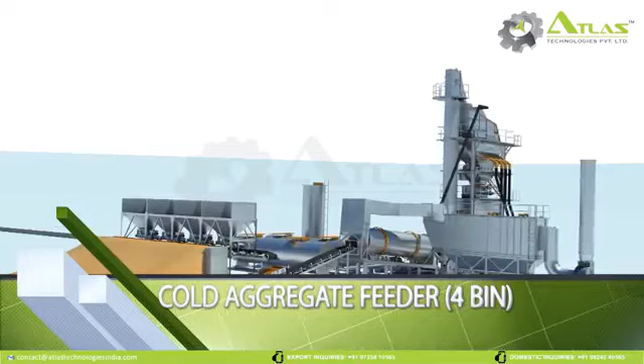The material is poured into the aggregate feeder system comprising of 4 bins. The feeder belt conveyor is mounted under each bin. This gathering belt conveyor transports the aggregate to the vibro feeder system.

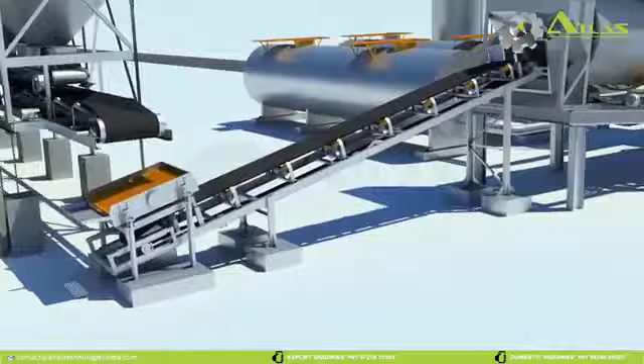Drying drum: the dryer is divided into 3 sections. The conditioning section, where aggregates are fed into the inner dryer and start forming a curtain. The combustion section, where the burner flame is maximized to heat up the aggregates in a short while. The discharge section, where the hot aggregates get discharged out of the dryer.

Pollution control unit. The air along with dust particles enters into the pollution control unit. The heavy particles are separated from air in the pre-separator area. Then it's allowed to pass through a series of bags with the help of an induced draft system. Fine dust particles get accumulated on the bag and clean air passes through the bags and is released into the atmosphere.

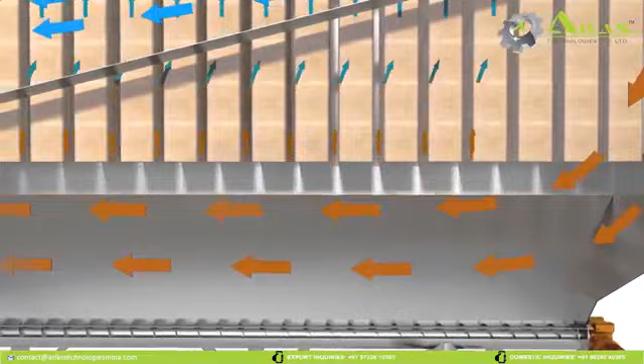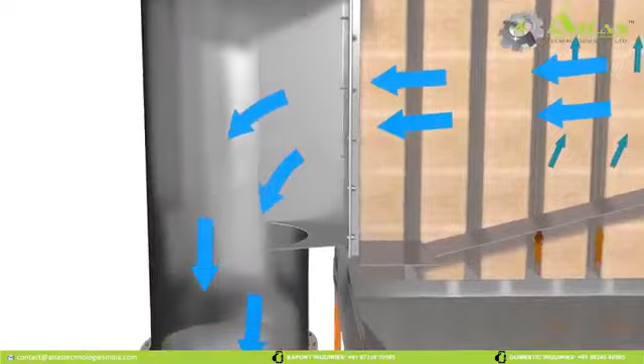The bag filter has sufficient filter bags to collect the dust. The filter bags are completely cleaned by a reverse airflow system operated by a Geneva mechanism. All the dust collected from the bag filter is carried to the dust hopper through the screw conveyor.

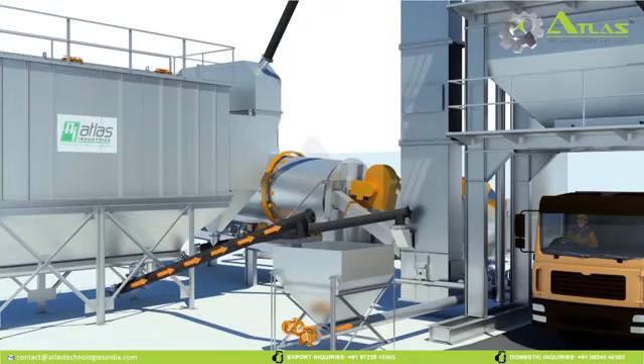Dust hopper: all the dust collected from the bag house is accumulated in the dust hopper. Dust from external sources can also be added to the dust hopper. This collected dust is transferred to the dust storage hopper mounted on the tower via screw conveyor.

Hot elevator: after hot aggregates get discharged out of the dryer, they are elevated and carried into the screen by the bucket elevator.

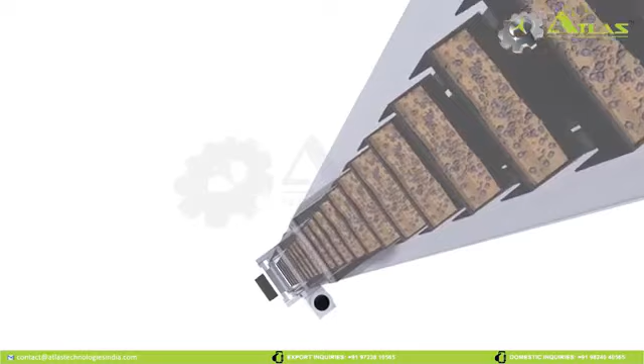Now let's move on to the vibrating screen system: vibrating screen, hot bin and aggregate weighing hopper. The Atlas vibrating screen is much easier to maintain. Screen mesh can be replaced easily by push and pull action. The vibrating screen separates the aggregate into different sizes and discharges them to their respective hot bin compartment.

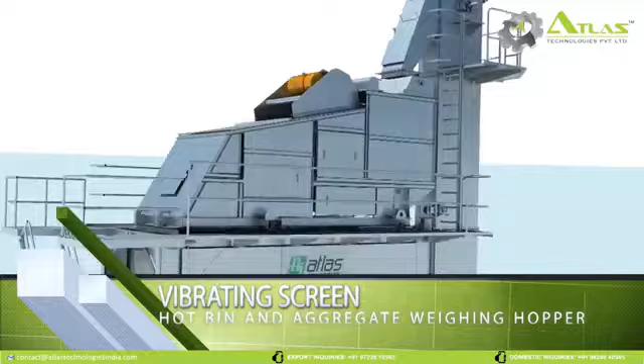Each compartment of the hot bin contains a radial gate at its bottom to feed aggregate into the weighing hopper. Aggregates are discharged from the hot bin according to a predefined recipe into the weighing hopper to create a batch. Once the batch is prepared, it is discharged into the mixer.

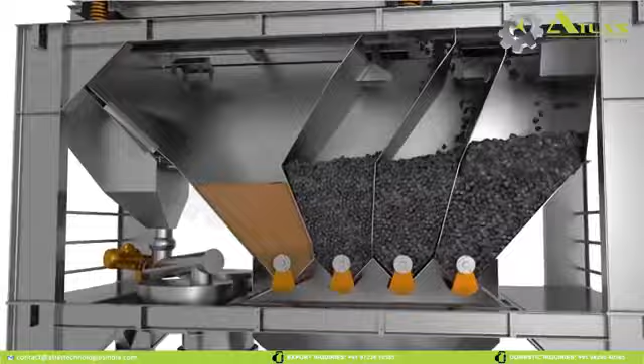Bitumen and dust weighing system: the bitumen and dust from their respective storage are supplied to their respective weighing bin where they are measured accurately and then efficiently discharged into the mixer.

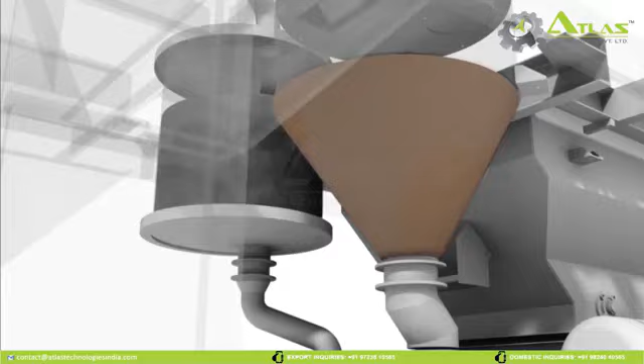Storage silo: asphalt mixture is now stored in the silo and from there it will be discharged into the truck. The fresh high-quality asphalt is now ready to be laid on the road.

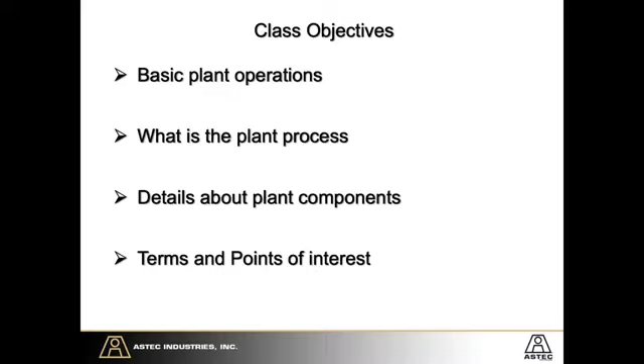Basically, the class objectives are going to be basic plant operations, what is the plant process, and details about the plant components, along with a lot of terms and points of interest.

As you can see in this picture, these are some of the models that we use for training, and this is a stationary asphalt plant. The models give a good representation of a clean asphalt plant that you can actually go in and take a look at the components without the dirt, debris, mud and grease on the components. So as we go through this, we're going to refer to these models many times during this presentation to give an adequate determination of what's going on with the plant.

Here's a portable plant. As you can see, the footprint's a lot smaller. One of the reasons for portable plants is they're highly portable - they can be moved around easily. You can see that everything is pushed together in a much tighter space.

They are still capable of high production rates, all the way up to around 500 tons per hour. At the center of every asphalt plant is a control house. This is the central location for controls. It manages all of the plant operations.

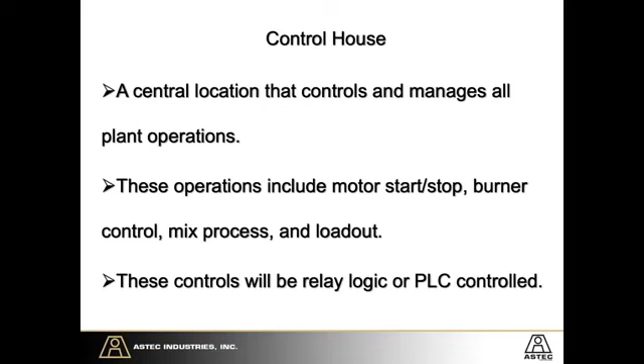These operations include motor control, start, stop, burner control, mix process, and loadout. These controls could either be relay logic or PLC controlled. In the lower left-hand corner is a relay logic picture of a relay logic plant. In that plant you'll notice lots of push buttons and consoles around the entire perimeter of the control house. 20 years ago, this was the normal, and this is what you would have seen in any asphalt plant.

As we move forward, in the last 20 years, lots of PLC controls have been introduced. These PLC controls have changed the demographics inside the control house tremendously. Instead of having several consoles around the perimeter, it's very common to just have two computers processing the whole control inside. It's been a change for operators over the years, but the PLC is being pushed and mandated a lot of times by the state.

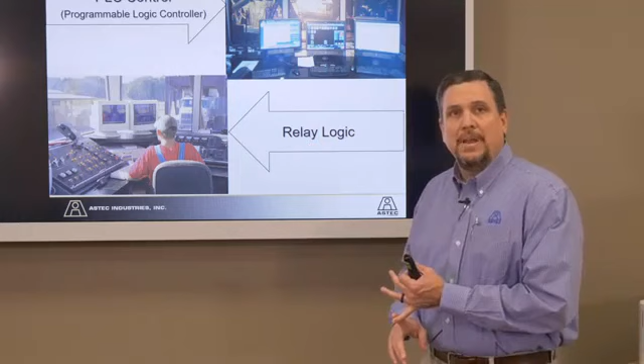Even on the older relay logic systems, when you looked at a blending control, that particular blending control more than likely had either a proprietary blending control or a PLC blending control associated with the push buttons. Some people ask, what's a blending control? The blending or mix control allows the operator to enter a job mix formula that can control and properly proportion aggregates, recycle, asphalt, dust fillers, and liquid asphalt to meet the required specifications.

These blending controls have changed a lot over the years. Back when asphalt plants first started, if you were at a batch plant, you would pull levers to get the ingredients that you needed, and they'd be weighed up on a scale, and you basically just eyeballed what came up. Now that you've got computer systems involved, it's a lot more precise. Mix specifications can be a lot more calibrated, and everything can result in better mix quality.

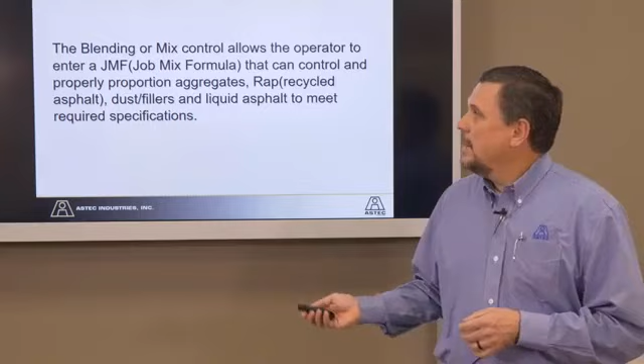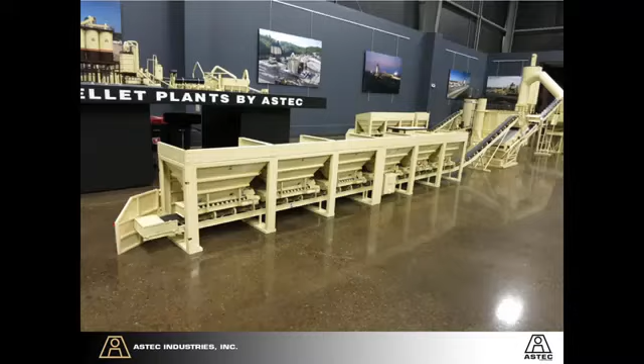If we start with this process, everything starts at the cold feed bins. This is where your virgin aggregates are entered in. Here's a good representation of a 6-compartment cold feed bin. As you look at these cold feed bins, they're always going to refer to the one that's closest to the shaker deck or the conveyors as your bin number 1.

That's where you're going to put your fine material. And as you move through those bins, the coarser the aggregate will get. So you start out with very fine, and then as you move down you become coarser as you get back towards the end of that. As we go through the presentation, we'll talk about that and the reason for it a little more.

If you get a top view of the cold feed bins, this is a grizzly that you see on top of this. Some people ask, what's a grizzly for? Well, a grizzly is to keep all of the debris larger than the specified material out of that bin. You take sand -- things like that are very fine. That's where you see your grizzlies at.

The reason you see grizzlies is because a lot of times roots, debris, and sand that has congealed together and made a large ball -- you do not want that type of material to fall down into the bin, and we'll talk about that too as we move forward.

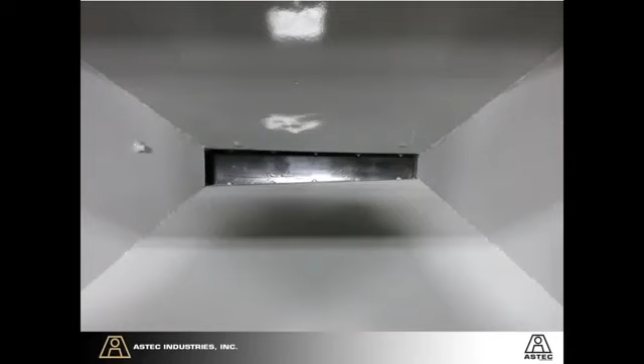If you take the grizzly off and look down into the bin itself, you'll see that at the rear of the bin you have an opening, and then as you move forward that bin opens up a little bit. What that means is that it's self-relieving. And so it does two things: one, it keeps the bin flowing well, and two, it keeps the bin falling evenly.

You talk about segregation -- segregation in a cold feed bin, as long as you've got good material, should be minimal. But when you move to a recycle bin or something like that, and you're not fractionating properly, it is very, very easy to segregate the material. So that is the reason for the self-relieving bin.

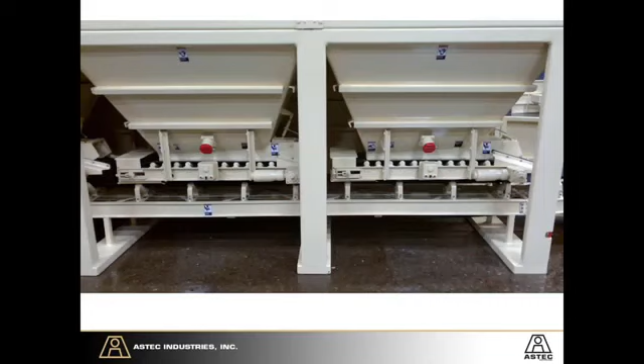Here's a side view of the bins. If you look at this bin, they are equipped with vibrators. These vibrators actually keep that material flowing. They can be designed a lot of different ways. Sometimes they can be connected directly to the bin.

Sometimes they can have a dancing plate on the back. And sometimes you can use bin butlers or things like that to keep that material moving. But these vibrators can be controlled automatically or they can be controlled manually. One of the things a lot of people do is when they see no flow, they hit these vibrators to keep the material flowing.

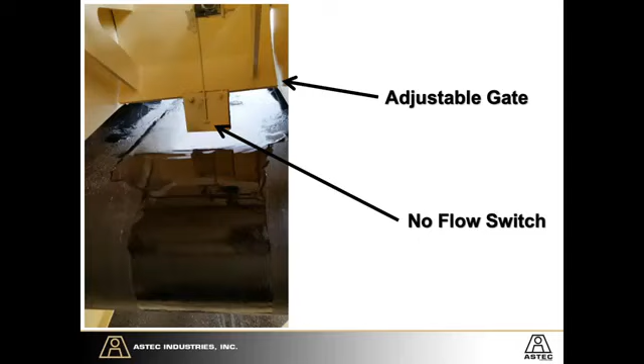If you go to the front of each bin, you'll notice two things: an adjustable gate and a no-flow switch. This adjustable gate does several things. You can increase or decrease the amount of flow you get out of this bin. It's volumetric, with tach feedback off of it, so you can speed this belt up or slow it down and use that gate adjustment to change the flow or the TPH.

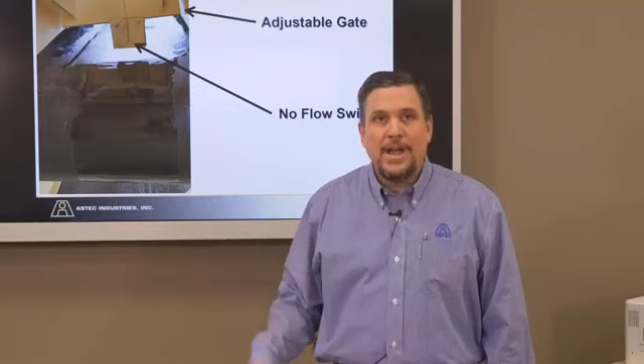Also, you have a no-flow switch here. One common thing that happens at plants as a maintenance item is that the no-flow switch gets removed or pried out of the way so it won't show a no-flow at the plant. If that happens at your plant, it can cause inconsistent mix or mixes out of spec due to material that's fallen into the throat of the bin.

As we go back and look at the side view of the plant again, looking at your cold feeds, we talk about feeder delays and point of mix times as we move through the presentation. Some people may ask why feeder delays are important. The reason is that they can really cut down on the amount of waste, and they can also increase the quality of your mix.

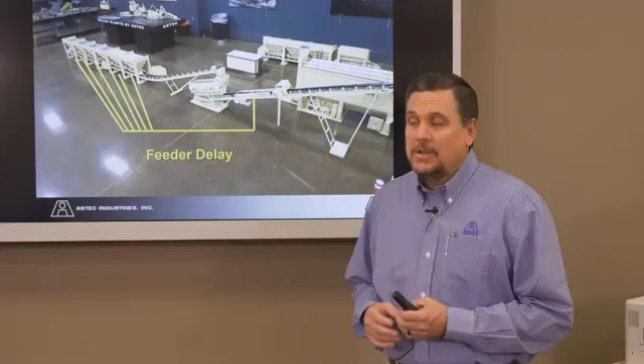A feeder delay—some manufacturers call them start-stop times, feeder delays, lots of different terms, but they may mean the same thing—is basically the time from when this feeder starts until it gets to the weigh bridge on the incline conveyor. So those times change.

A lot of times at a plant, customers will go in and say let's make it 2, 4, 6, 8, and 10. Well, that's not really a good representation. If you get that time precise, all of this material will come to the weigh bridge at one time. It'll be weighed correctly, and as it's conveyed through the rest of the plant, the material will stay close to each other. You will not get segregation, and you'll really minimize the amount of waste at your plant.

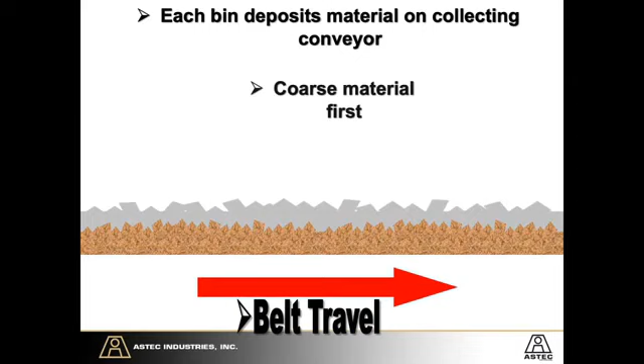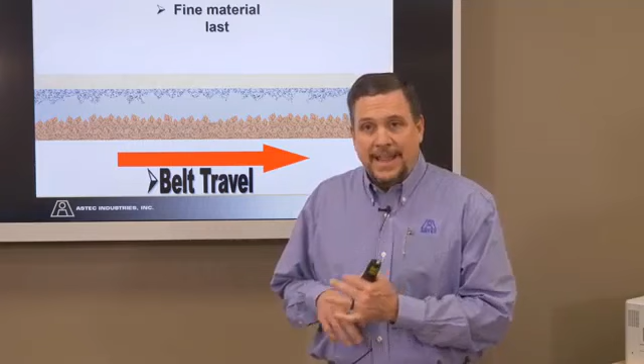You see the coarse material first, continue the belt travel, and then we place our fine material on top. One question a lot of people ask is why do we put the fine material on top? The reason is two things: first, it keeps that fine material off the belt, reducing buildup and reducing maintenance for belt scrapers and things like that. Also, it gives it a bed so it can stay up there and mix a little bit easier.

As the material continues on, it comes to a scalping screen or screen deck. These can be single or double, with different mesh sizes to reject material that's larger and doesn't belong in the mix. This is also the first time you get a little bit of gentle mixing. The material is layered and properly proportioned on that belt—you can see they're very close to one another, but segregated, with your fine material, then getting a little coarser each time as you go down.

As it hits the scalping screen, you get the sifting action, or a small mixing action, and you can see that the unmixed material is not visually detected. If you're looking at the incline and then look after it passes through the screen deck, there's a big difference in the way the material looks. It's no longer segregated, everything has been mixed, gently mixed, but it has been mixed. You can see this representation of the material.

Here's your distinct layers, and as it goes through the scalping screen, you can see where it has the gentle mixing as it goes up the weighbridge belt.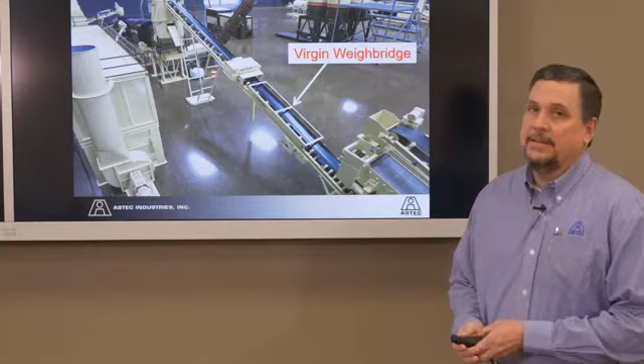Right below that, usually down on the lower end of the belt, you'll see what we call a gravity take-up, and that gravity take-up is used for one thing: to take the inconsistencies out of the belt. As a belt warms up, a lot of operators are going to warm their belts every morning before they start the plant, the reason being to take the stretch out of the belt and the inconsistencies. Basically this just keeps tension on the belt to take those inconsistencies out. It stops belt hop, it stops a lot of different things.

Some people may ask, well, I don't have a gravity take-up on my incline belt with my weighbridge, is that going to give me a problem? It very well could, but sometimes as long as you keep maintenance up well and take care of your belt, you can do it without a gravity take-up, but it is much, much better to have the gravity take-up in place.

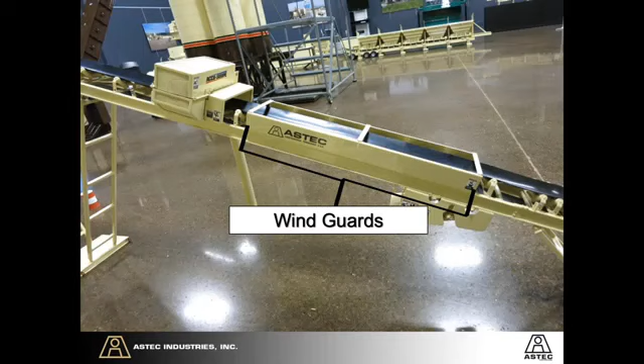Here's a good picture of the wind guards that we talked about. It keeps the weighbridge hidden, so it's easily disguised, and it usually is not maintained very well because of that.

You can see here's the reasons in this picture, and it gives a little bit of an illustration. If you can see the wind on the flag, how it's blowing that flag straight. If we did not have these wind guards here, we'd get belt slap, which would give you inconsistent belt readings when you tried to do the zeros. So it could cause you problems when you're trying to make mix.

The virgin weigh belt is combined for all of the cold feed bins. The weighing is done by a combination of weight and speed. You have to have weight and speed for this. It requires alignment, we talk about string lining, and it also requires calibration. When talking about calibration, some of this is done through scale factors, some through constants, but every cold feed bin needs to be calibrated, and the virgin weighbridge does also.

The signal from this device is transmitted into the control room for process control, and that's where that information is stored and used for the job mix formula. The virgin weighbridge is the primary scale on the plant. It is the primary scale. All other scales follow it.

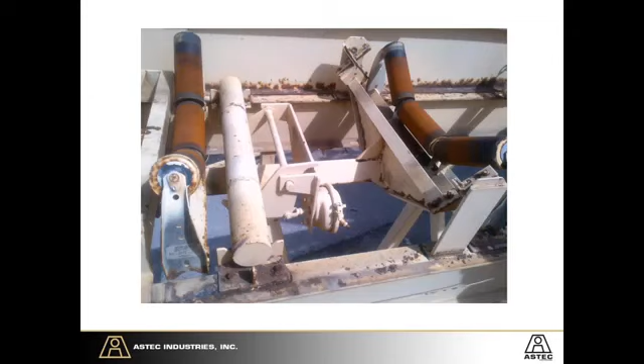Here's a Barber-Greene weighbridge, a little bit different design, has a lot of weighing idlers. A lot of the designs are kind of built off of this. It had a flex point, or what we called a flex door here. As that material, or that metal flexed, that's where the pivot point for the weighing idler was. The only problem with this style weighbridge is, like any type of metal, if you flex it enough times and bend it back and forth, it will fatigue and break, and that's what you would see. You would see broken flexures in this area of the weighbridge, and what that would cause is inconsistent mixes.

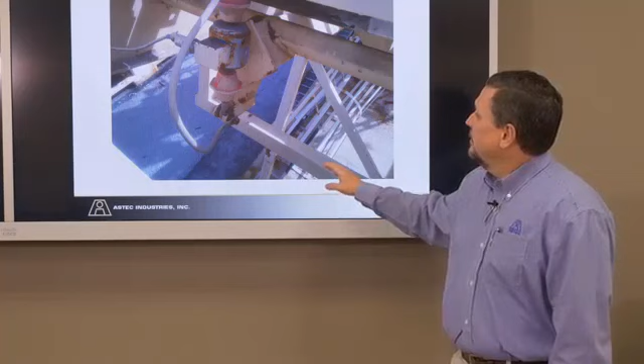One of the reasons for that is barometric pressure, which can affect these. You'll see a few other things too here. There's some insulators, those red items, and a cable that goes around that. It's for two things: one for lightning protection, and two, if there's any welding done on that conveyor, it can direct that charge around the load cell so it won't burn it up. Lots of times on lightning strikes, the load cells and the tachs are what take the hit.

When we talk about weighbridges and weighing, we want to look at the weighing idler, and the 3 idlers above it and the 3 idlers below it. When we talk about stringlining, that's what we're stringlining, all 7 of those rollers, to be the same height. Some people will say, hey, I want that roller a little higher, or I want that roller a little lower. No, you will never go wrong if you keep all of those idlers at the same height and square them up to the conveyor. If you do that, you're basically taking the inconsistencies out of the metal, which in turn will give you a quality mix, a very good weighing device.

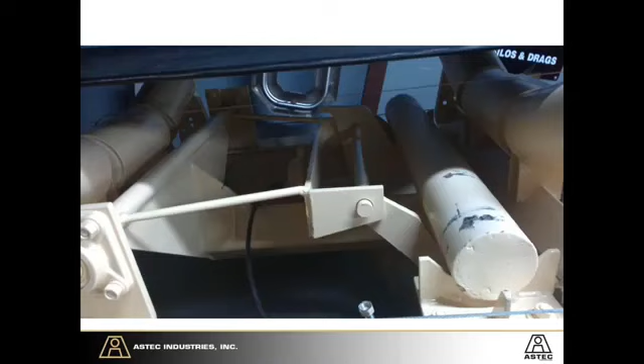As we push through and look at this, we can see here this is the device for the test weight. You can have a test weight here. It gives the operator the ability to do a quick test to see if the calibrations are in. There are some pinch points and things here you need to be aware of. Also, when you do an inspection and remove these wind guards, these are also areas for material to fall in, so also look for that.

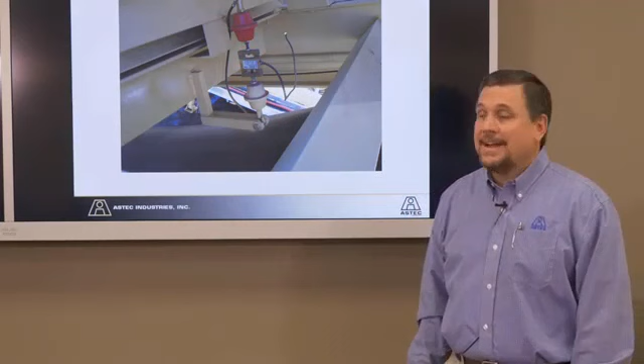Here's a more new style S-type load cell. There's several advantages to this style load cell. One is that it has some built-in lightning protection, which is always a good thing. Secondly, it's not affected by the weather, barometric pressure will not affect this load cell. You still have the jumper that goes across it for diverting any type of electrical charge, and you still have the insulators to try to isolate it from any type of lightning that goes across the grounded equipment.

As the material moves on up, it's going to enter into the drum, and there's something else that affects it. As soon as it drops off the head shaft of that conveyor, it gets affected by the exhaust system, and that's where we're going to go next.

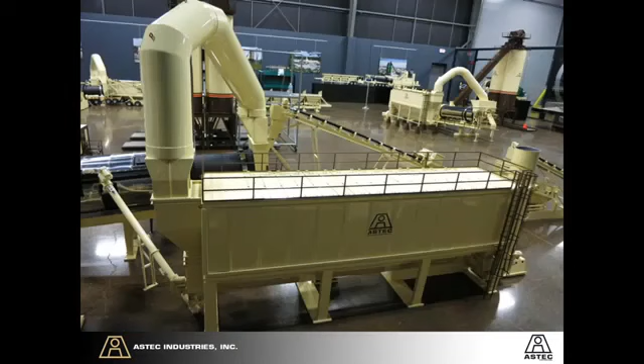When we talk about the baghouse and exhaust systems, this is a pulse jet baghouse. You can see here's the stack that comes over, pulling the fine material, the minus 100, minus 200s. This particular one has an inertial separator. Here's the baghouse body, and then the exhaust fan on the end.

So they're able to do that on the exhaust fan. It does two things: it reduces the noise tremendously, and it also saves energy. Everyone likes to be able to go green. This is a great alternative to going green, using a VFD, which is a variable frequency drive, on these exhaust fans. They've really taken that to a whole different level. Now we use them on drags, drums, and there's lots of advantages, energy savings being one of the most.

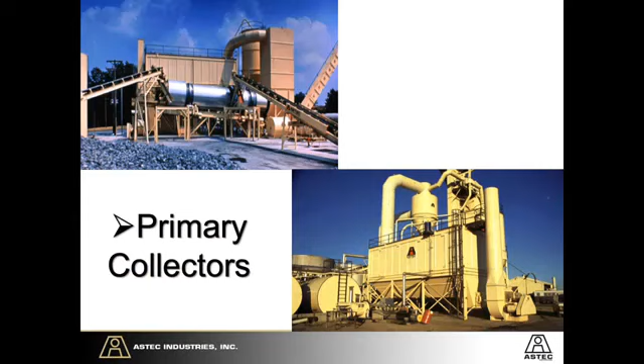Here's some views of some older plants with primary collectors. If you look up on top, you've got the knockout box, more of a conventional style. You can see it's basically very high up in the air. The ductwork's up high, kind of hard to maintain and look at. It really changes the footprint of the plant.

If you look down in the bottom, you've got the vertical cyclones. They're still used to this day. We see a lot of manufacturers still use that. The thing you do see is you've still got the ductwork up very high, lots of crane costs and stuff if you're going to move that plant. So sometimes that is the way people like to go, but they've changed a lot over the years.

Everyone kind of moved to horizontal cyclones. If there's anything at all about the horizontal cyclone that was a downfall, and we still use them a lot today, it's that they were almost too efficient. So we had to put skimmer plates in the bottom, and then you were allowed to adjust those skimmer plates to control how much dust you were pulling out of the drum.

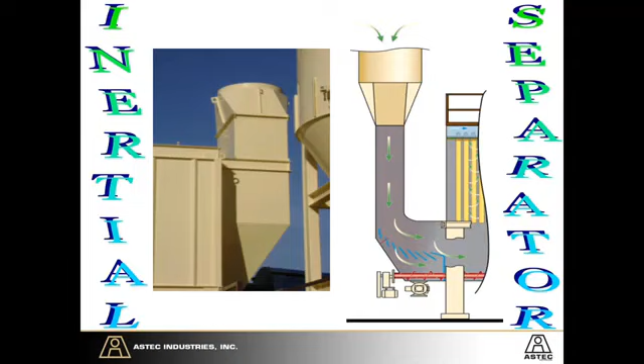The new design, or what we're mostly seeing now on plants, is called an inertial separator. It's more of an elaborate word for an elbow. As you pull exhaust from the drum, as it moves down this high velocity air, the heavy materials hit these louvers and fall straight down into the auger. Then you're conveying most of your minus 100s straight back over to the drum. The lighter dust, the minus 200s, gets conveyed over into the bag house. We've got some illustrations that will show you a much better representation of what we've got here.

So what is the function of the exhaust system? Well, it's really to evacuate the drum, to get the steam and the products of combustion. Everyone knows we're drying this material, taking the moisture out. As we dry that moisture out, we're going to get that steam and the products of combustion, whether it's with natural gas on the burner, fuel oil, or LP. Other things that affect that too are the excess air, which comes from the burner blower, and also any type of leakage air.

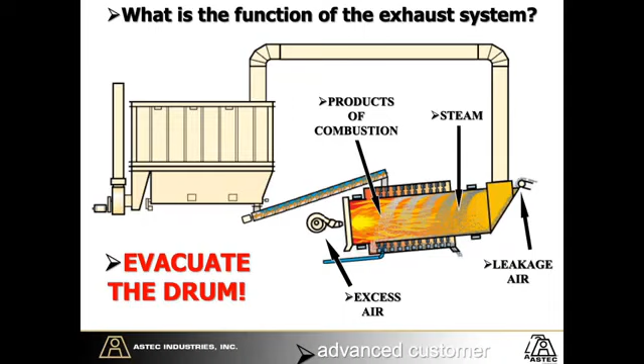That leakage air can come from a couple of different places. One is where you see the aggregate introduced into the drum, that's one of the main places you'll see it. A lot of times you can put a curtain or something like that up to reduce that leakage air.

In the United States, every state has to meet a particulate test, which is basically how many particles you're blowing into the air, and everyone has to meet that requirement. The other thing you see in some states is you have to do flue gas analysis, which is how you tune that burner to be as efficient as possible, and you have regulations you've got to meet on that. But everyone has to make sure their bag house is maintained well for the particulate test.

When we talk about the exhaust fan, we're pulling on the drum.

A lot of people call that burner suction. That's what we call it. Basically what you're doing is you're stabilizing that flame and you're evacuating that system.

Some people ask, well, what's the ideal situation? How much burner suction or how much exhaust fan do you want to put on the plant? It can change depending on what type of equipment you have. A good rule of thumb is just above a puff.

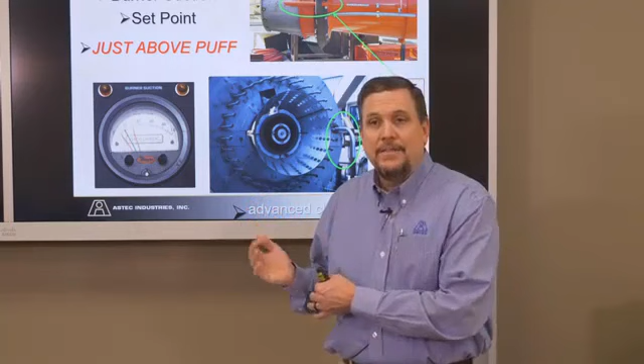Usually 0.25 or 0.2 is the best, but sometimes you may have to run that a little higher or a little lower. If you have to run that extremely high, then you need to start looking at other places for a potential problem, like leakage air or something like that. But just above a puff is what a lot of people, and that's how a lot of operators are trained.

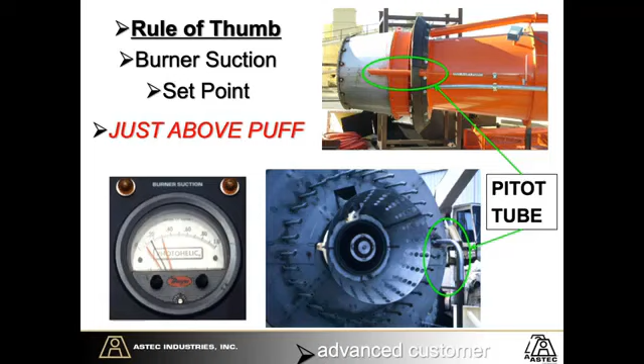How's this measured? It's measured with a photohelic, and on the burner end there will be a pitot tube. Those pitot tubes can be located in a couple of different locations. Some of them are turned down 90 degrees, some are straight, but that is where that burner suction, the inches of water column, is looked at. And we usually want to keep them around 0.25.

So we're going to look at this animation of the bag house. I'll try to narrate the dust coming through the system.

Here's the tube sheet with all of your bags. According to capacity and CFM, the bag count will change. You will have to have extra modules for the larger capacity plants or if you're in higher elevation.

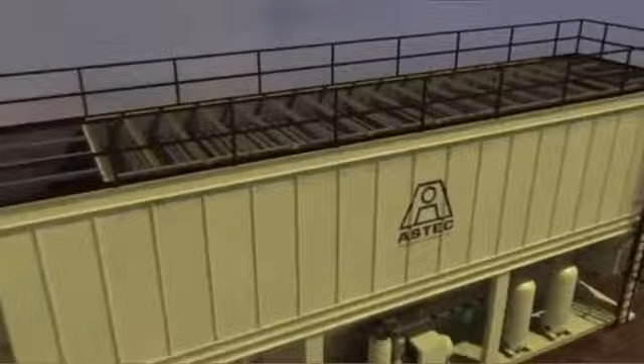This is the solenoids. This is actually a pulse jet, so that means the air compressor, the plant air compressor, is providing that air to shock those bags or to knock the dust off the bags. Here's your screw conveyor to convey it to the drum. And here's the exhaust fan that pulls up to the back side of the bag house.

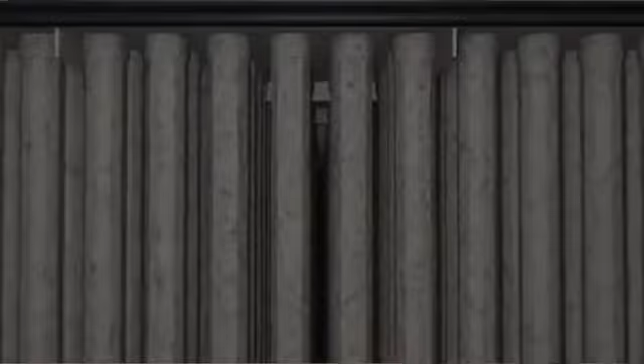As you pull the dust into the stack, it's going to fall down through. Here's your high velocity air. It hits the louvers, your minus 100s will fall, your minus 200s will move on into the bag house. As the dust moves into the bag house, it will cling to the bag.

This is your dirty air side, and it will push the clean air up through the top to the clean air. Here you see the blow pipes pulsing down into the bags, and what they're doing is shocking that bag and knocking that dust off. So here's an illustration to show that.

As it falls down into the hopper, you can see you've got the hopper screws conveying that material back towards the drum. And there can be lots of different screws on the outside of that drum, waist screws, lots of different screw configurations.

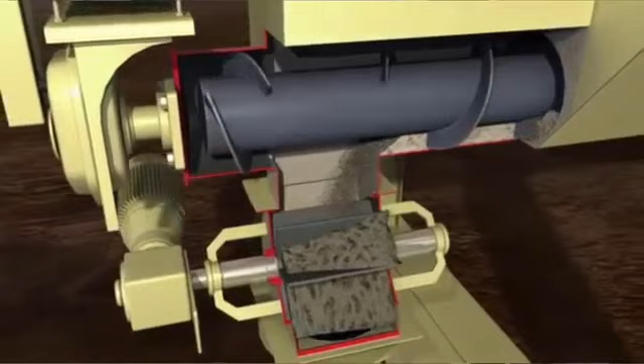Here's a breakaway of an airlock. You can see that here's the minus 100s and 200s put into the airlock. The reason the airlock is in place is basically because you want to keep the air away from it. You don't want to pull that dust back out of the screw, you want to convey it to the drum. Also, it allows you to keep surging at a minimum.

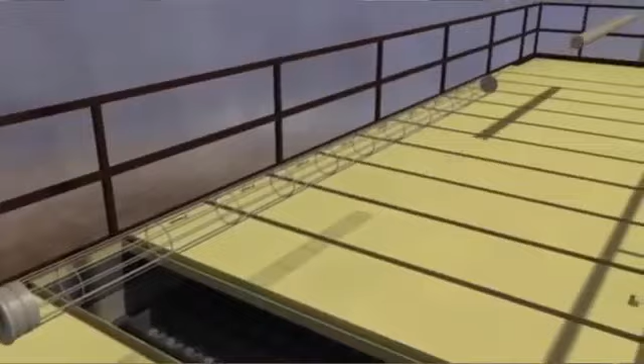Just a quick representation of how you would change a bag. Cage pops in, you would put your blow pipe back into place.

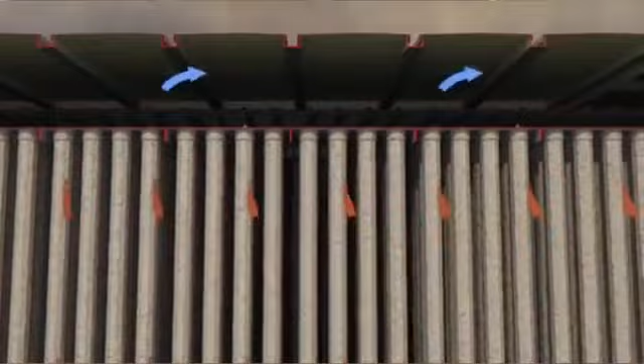And here's an animated view of that. You can see the dirty air coming in, coming up between the bags. And as we're pulling suction on that, we can see the clean air coming up into the clean air of the plenum. Then as it conveys on down, as the air moves out and it's trying to be exhausted, you'll see this exhaust go down into the exhaust fan and pulled out with the impeller.

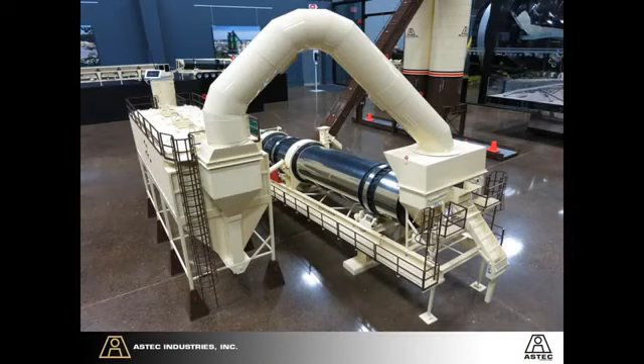This is a different style bag house. This is pulse jets, what we just looked at, but this is a reverse air, or roto air as most people call it, roto air bag house. This roto air is a little different in that it has sets of turrets. These turrets make it more of a mechanical style bag house. It uses outside air instead of compressed air to shock the bags with.

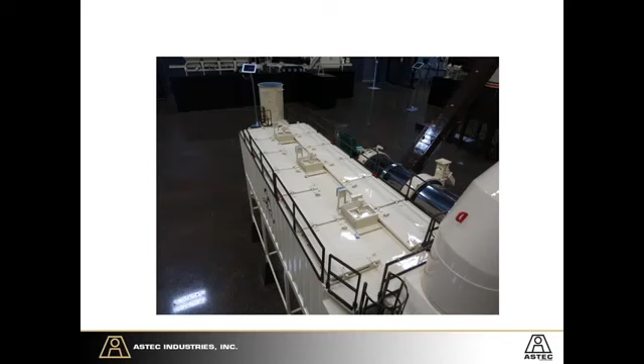As we continue on with the dust and look at the different types, once dust leaves the bag house, it can either be sent to a dust silo or conveyed back to the drum. The most simple form is conveying it straight back to the drum, and that's what we see 95% of the plants have.

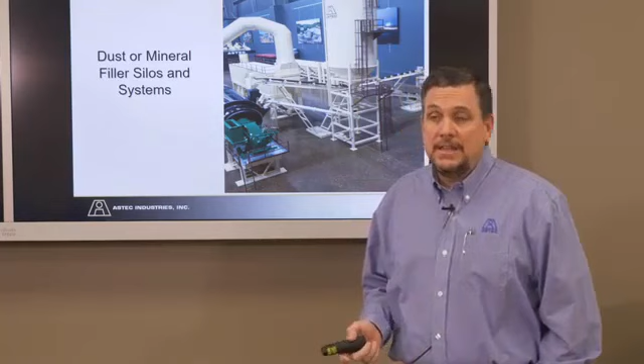As you get more elaborate, or if you have dirty materials, you may have what they call a dust runaround. Dust runaround means you meter the dust coming out of the bag house, and you also meter the dust that's going back into the drum. So you would meter it both ways.

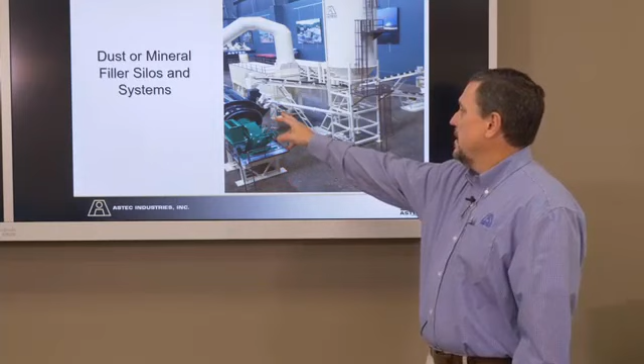Now also, when you look at dust, we can refer to it a little differently. Dust is from the bag house, while mineral filler or any other additive is a mineral filler. We can have different systems doing that, and on this particular system we have a conventional screw conveying it straight up to the drum, and we also have a mineral filler system.

On the mineral filler system, how would you meter that? In my opinion, the only way to meter mineral filler dust is with a weighing device. Some people choose to remove the weigh pot and use just an airlock, but here's the problem with doing that: if you take an airlock capable of doing 15 tons an hour, that means all of those vanes in that airlock would have to be full. If that material is only halfway full, that means the airlock is only capable of doing 7.5 tons an hour, not 15 tons an hour, regardless of speed.

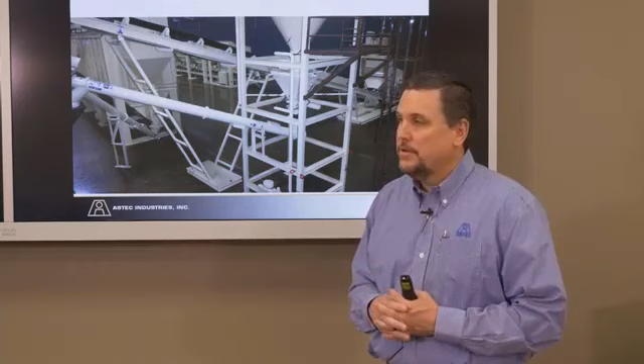There's something visual there that you can't see, which makes it very hard to troubleshoot if you're looking at a dust problem. The best way is always to do it by a weighing device with a weigh pot, and you can see here this is what we have on a weigh pot. Weigh pots are pretty popular, and probably what you see on most mineral filler systems.

There are also impact plates and a few other devices used to meter dust. They are weighing devices too, so if you can use that, that's the best way to look at the weight of mineral filler. On this mineral filler system, there's a butterfly valve at the top which opens and discharges the mineral filler into the weigh pot. You would take a weight here, then the airlock turns, discharging it into the drum and introducing it into that screw for the drum.

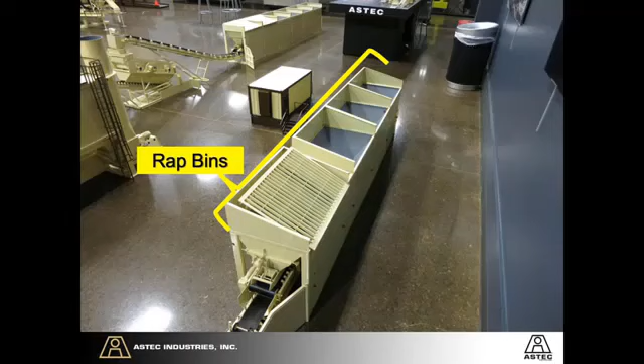Continuing on to the RAP bins. RAP bins have become very, very popular over the years, again because it's green. Most of the time 20 years ago, you would have had one RAP bin per plant, and you may or may not have used it at your plant. Then it became more common to see 2 RAP bins, but now it's not uncommon to see 3 or 4 RAP bins, and they can take it in a lot of different ways.

They can really put in RAS and some other things, which we're going to talk about. The bin configurations on them are very close to what you see on cold feed bins, just with slight modifications to help with the flow, because RAP sometimes is a little harder to flow with. One of the major changes you'll see is that it has a flat bin wall.

Again, reducing the amount of drag that you will see. One of the things you see with RAP as weather gets warm or you get big changes in temperature, that will affect how that RAP sticks inside that bin. So having that straight wall allows that RAP to flow better. Another thing you'll see is that the conveying belt at the bottom of that feeder is much wider, usually a 36-inch belt, and you also still have the adjustable gate. Again, it's all there to allow that RAP to flow more freely.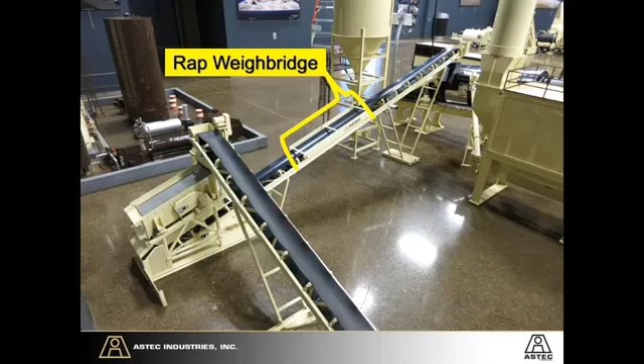As far as the conveying system, you still have a RAP weighbridge. That RAP weighbridge is going to follow the virgin weighbridge. It's the combined weighing for all of the recycle bins. It also has to have the combination of weight and speed, so you've got a weighing idler or a load cell, and you also have a belt speed tach or an encoder. It also requires alignment and calibration, sometimes using scale factors or constants.

And the RAP weighbridge is secondary to the virgin weigh bridge. So if there's ever a question asked, the RAP's always going to follow the virgin. If you get a deviation in the virgin, you're going to see a deviation in the RAP weighbridge.

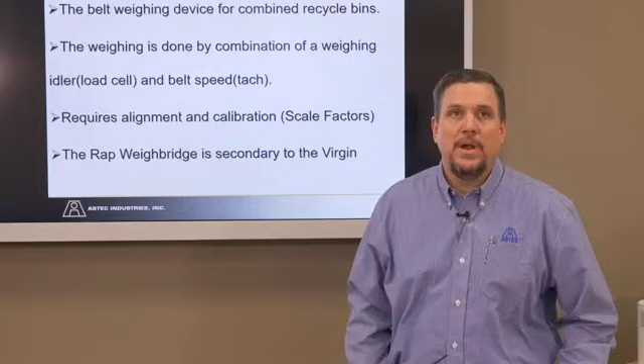More about RAP - one of the things you see more and more is people fractionating RAP. Basically that means you're treating it like an aggregate, like a virgin aggregate. What you can do is crush it and fractionate it up into distinct sizes, like half-inch minus, three-eighths minus. At those different fractionations, you're going to see different AC content.

Another thing we're seeing is higher RAP percentages, up to 65% RAP. Sometimes we even see a few people pushing it to 70 and 80. If you go over in Europe, you see a few 100% RAP plants. But most states regulate now somewhere between 15 and 30%, according to what state you're in. But if you're on private jobs, it can go all the way up to as much as 65.

RAS is another item that some people talk a lot about. It's recycled shingles or tear-off shingles, like coming from a manufacturing facility. There's several different ways to do that. You can use a conventional recycle bin for that. It makes it a little bit more difficult because usually you're putting in a very small percentage, less than 5% of the total mix of the plant.

So when you start conveying those real low amounts, the turn down on any type of device is always the most difficult to control. So when you try to turn down a cold feed bin that's capable of putting out 140 tons an hour or more down to 4 or 5 tons an hour or 10 tons an hour, sometimes you can have some problems doing that.

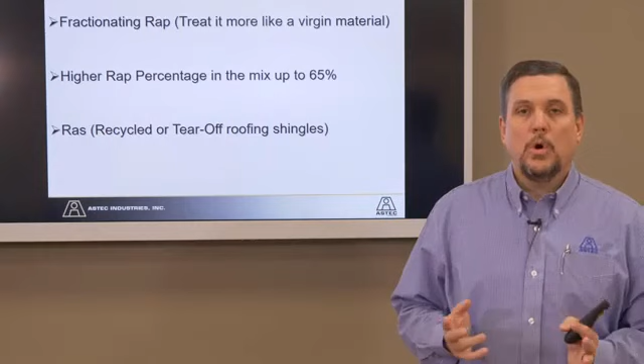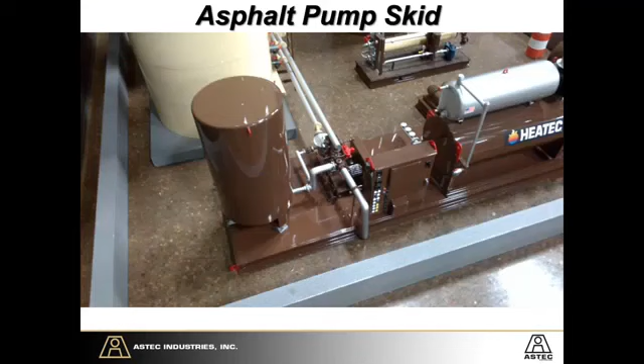Here's the asphalt pump skid. If you look on the left-hand side of the asphalt pump skid, that device there is a calibration tank. From a safety standpoint, that's probably one of the best inventions we have seen in the industry, in my opinion. Years ago, calibrating AC was dangerous - doing it into a tack truck or into a tanker put someone in harm's way very easily. Having these calibration tanks really minimizes the risk to the operators and to plant people in general.

Most of these calibration tanks, all manufacturers build them, hold right around 1,000 gallons. That 1,000 gallons is somewhere between 4.3 and 4.4 tons of AC. Use them as you should. Put 3,000 or 4,000 pounds in them. Don't underutilize them and put 400 or 500 pounds in them. One of the calls we take a lot on troubleshooting AC calibrations is that they're not utilizing the calibration tank properly, using it at a very low tonnage, like 500 pounds instead of 3,000 or 4,000 pounds.

This is a view of one that's going to actually go to the plant. You can see the two distinct pumps, and the divert valve here, some people call it the triac. This is the pushing pump on the bottom. The top pump is the metering pump, and that metering pump has a tach on it, so we're getting that tach signal or encoder signal back into the control room for the process control to make mix.

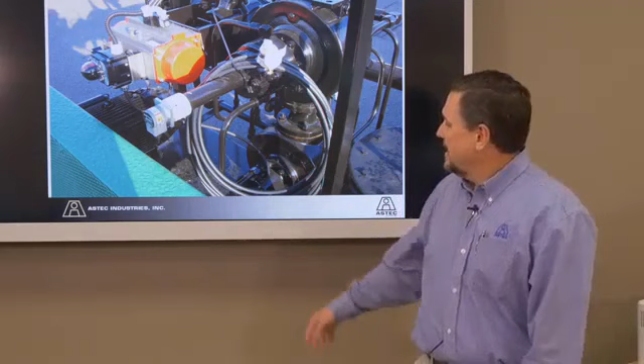This pushing pump - the main difference is these two pumps are going to be the same pump, but they have a plate on the back side that allows one to have a bypass. Your pushing pump will always have the bypass; your metering pump will not, it will have a blank flange on the back of it. So that's one way to tell. Also, your pushing pump's always going to be the one hooked to the motor.

One of the things you see commonly troubleshooting these pumps, if you get a plug in a line, you'll go out and do a visual check, and you can look at the shaft on this pump and say, hey, I'm circulating at half the speed of the pump. This shaft is turning very, very slow, and this shaft down here is running very, very fast. Sometimes you can see that visually. Most of the time that's going to lead you to the indication that this pump is bypassing, either for a worn pump or for a plug in the AC line somewhere - it's relieving itself to keep from blowing the packing out of the pump.

As we talked about, pump pushing a pump has a tach feedback, and the pump does require calibrations. One of the things we see more and more in the industry is a micro motion or a Coriolis meter. The asphalt control is secondary to the virgin and to the recycle. These micro motions, as far as accuracy, are very, very accurate.

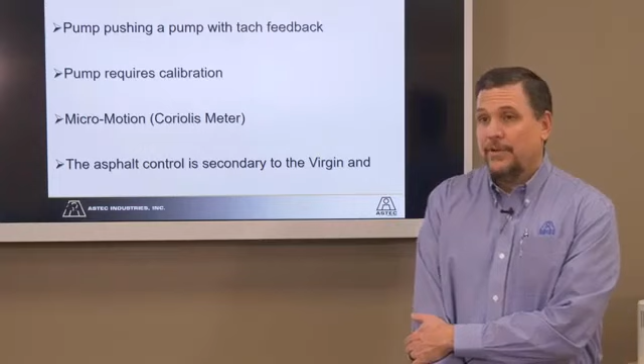We're going to show you a cutaway of them here. There are some states - California, the only one I can think of right now, I think Illinois in some of their areas has it too - that require by the state to use a micro motion. Any type of liquid, including water if you're using warm mix or additives, has to be done with that style meter. They are very accurate.

They do a couple of different things too - they also look at temperature compensation. Here's a better view of this sensor you can see. That particular one is on the tuning, and we also have the temperature change. One thing that's nice about those is, besides how accurate they are, they also do temperature compensation on the fly - very quick result, but again, a very expensive unit.

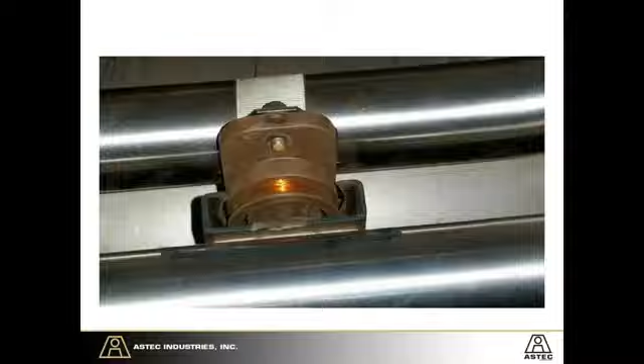I thought it would be worth showing because there are some in the area. When you talk about these meters and cost, they're about 3 times the cost of a pump pushing a pump. That's one of the reasons most manufacturers stay with the pump pushing pump system - because of the cost. You can buy 3 pumps for about what the cost of one of these micro motions is.